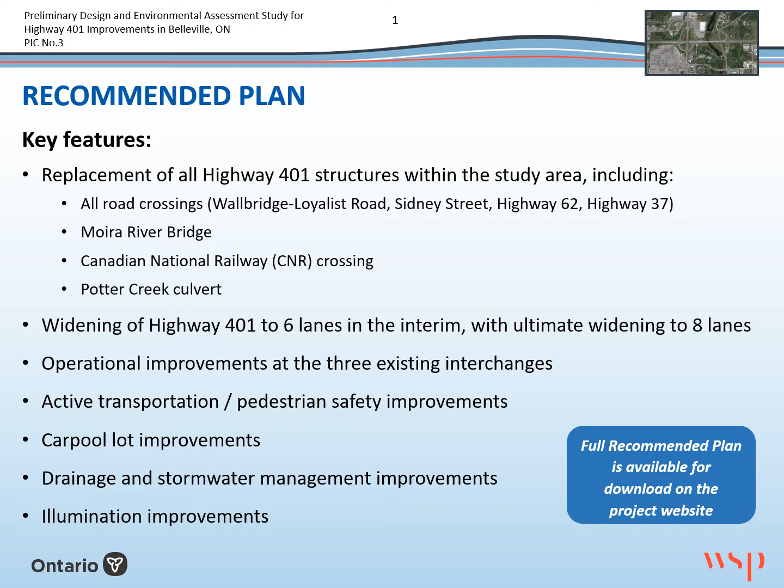The following slides focus on the interchange and crossing locations and will highlight the key features of the recommended plan. At the Wallbridge Loyalist Road interchange, the existing bridge will be replaced and the interchange ramps will be realigned to improve traffic operations and safety. To facilitate the improvements, Wallbridge Loyalist Road will be realigned to the west and tie back to the existing alignment by Grills Road to the north and Bell Boulevard to the south.

A new multi-use path to accommodate active transportation is proposed on the east side of the new bridge, and the proposed improvements are compatible with municipal plans for the future widening of Wallbridge Loyalist Road to 4 lanes. In order to accommodate the interchange improvements, the existing Potter Creek tributary will be realigned to the north and west.

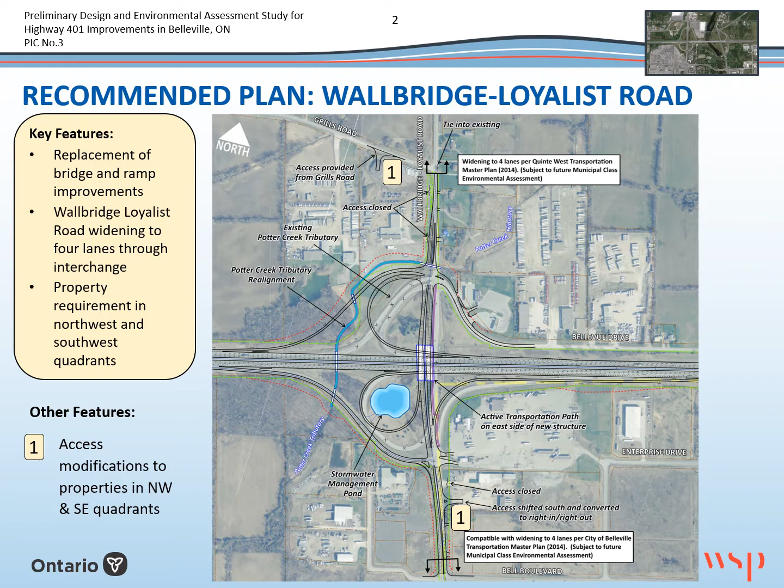There will be a number of property impacts in order to accommodate the improvements, and existing commercial accesses to the north and to the south of the ramp terminals along Wallbridge Loyalist Road will be either relocated or converted to right-in, right-out accesses.

At Sidney Street, the replacement of the crossing structure over Highway 401 will require a slight realignment of Sidney Street to the west. The replacement bridge is compatible with municipal plans to widen Sidney Street to 4 lanes. A new active transportation path will be provided on the east side of the new bridge, and a sidewalk will be provided on the west side of the bridge. Some private property will be required in order to accommodate the proposed improvements.

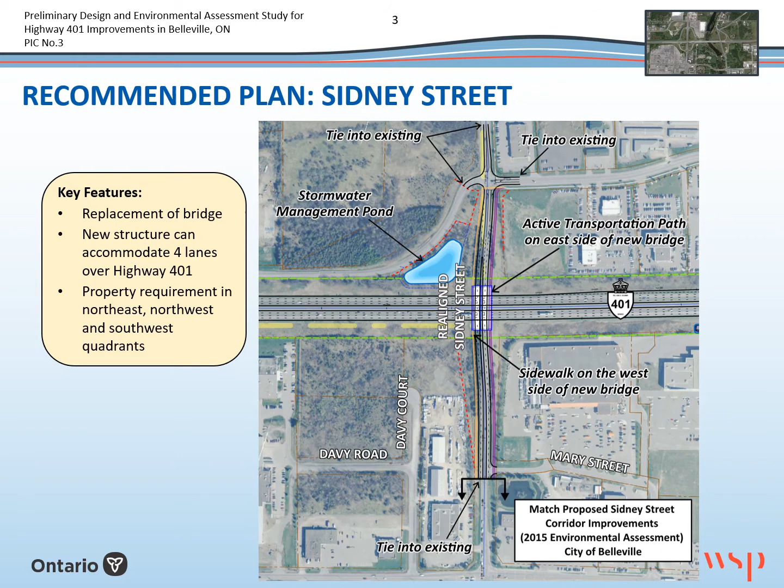At Highway 62, the interchange will be reconfigured so that the ramps are on the western side. This helps provide separation between the Highway 62 and Highway 37 interchanges and improve traffic operations on Highway 401. Having the ramps on the western side also provides opportunity for an active transportation path on the east side that would then have fewer ramp crossings and conflicts with traffic.

The active transportation path will help enhance pedestrian safety and active transportation routes across Highway 401. Its final design will be confirmed in future design phases and in agreement with the City of Belleville. Access modifications are required south of the interchange and are further detailed in the next slide.

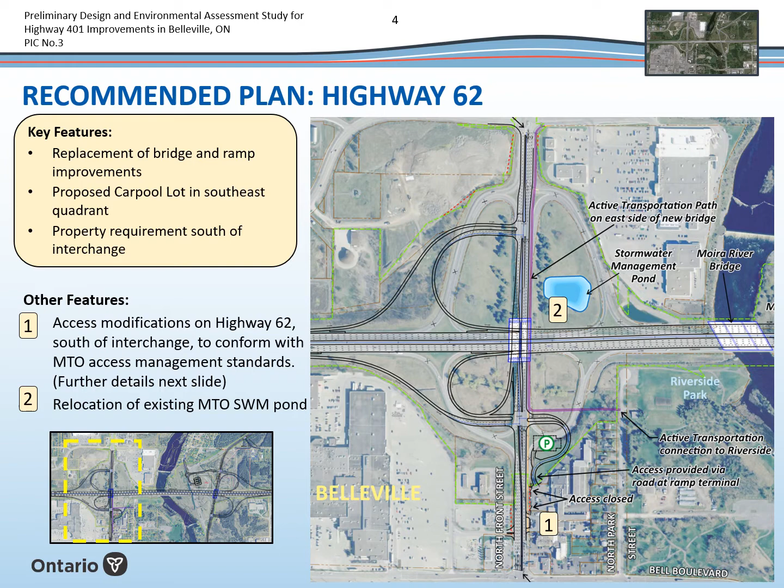South of Highway 401, at the Highway 62 interchange, a new carpool lot is proposed in the southeast quadrant with a connection to the ramp intersection. The connection will also serve as the new access to the existing business located adjacent to Highway 62, as its driveways onto the roadway will need to be closed to conform to current MTO access management standards. Other existing full access to businesses on the east side of Highway 62 will be converted to right-in, right-out only.

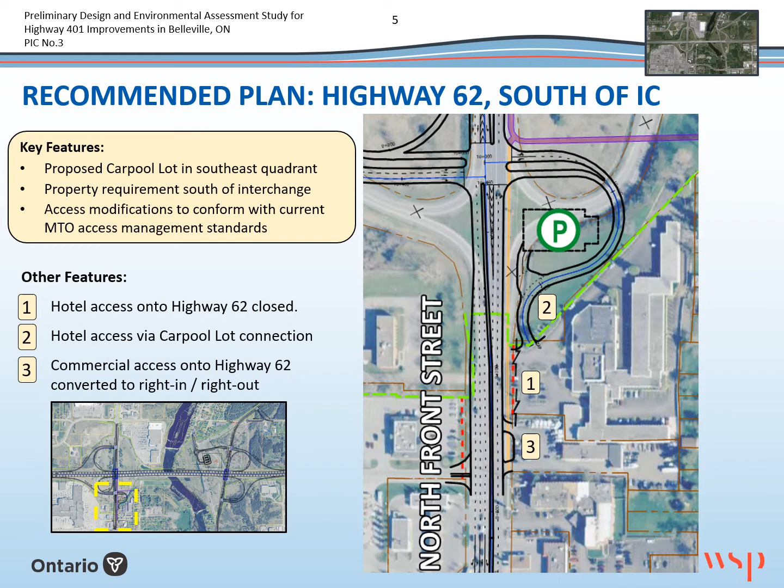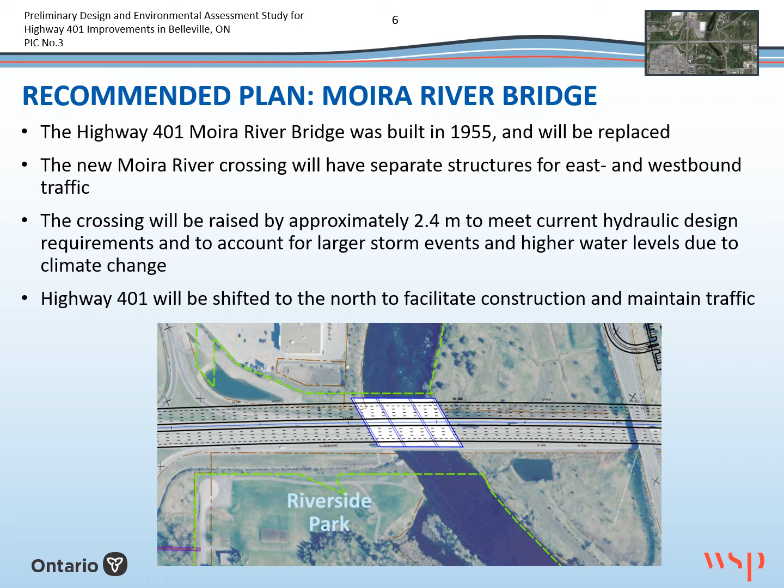The existing Moira River crossing was constructed in 1955, and like other structures along the corridor, it will require replacement. The replacement will consist of 2 separate bridges, one carrying eastbound traffic and one carrying westbound traffic. The new bridges will be built higher than the existing bridge in order to provide better hydraulic clearance for the Moira River. In order to maintain all lanes of traffic on Highway 401 during construction, a slight shift of the highway alignment to the north is required.

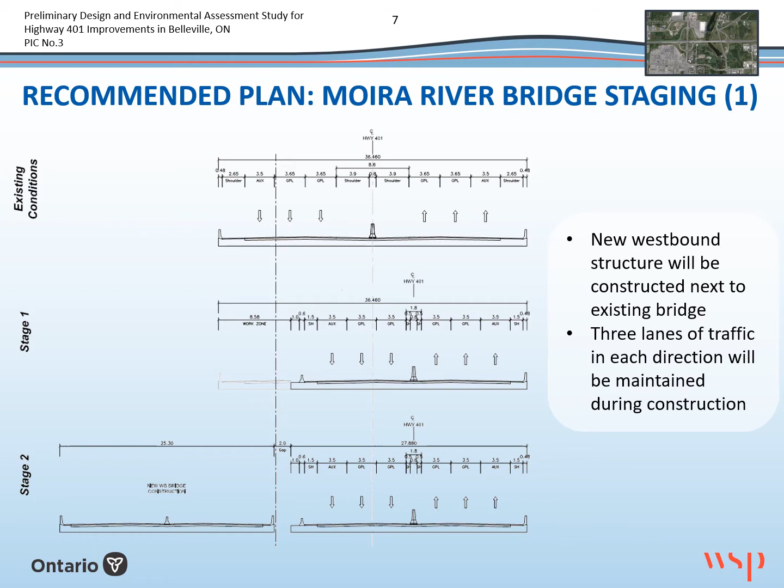The following 2 slides demonstrate how the Moira River Bridge will be replaced while maintaining traffic on Highway 401. In the first stage of construction, traffic will be shifted as far as possible to the south side of the existing bridge, and the north part of the bridge will be demolished. In the second stage of construction, the new westbound bridge will be constructed to the north of the existing bridge. In Stage 3, once the new westbound structure has been constructed, all traffic is shifted onto the new structure, and the existing structure is demolished.

In Stage 4, construction is complete, with eastbound and westbound traffic each being carried by their own bridge. At this time, Highway 401 can be widened to carry 6 basic lanes, plus 1 ramp lane in each direction. A further widening of the eastbound bridge in the future will accommodate an ultimate widening of Highway 401 to 8 basic lanes, plus 1 ramp lane in each direction.

At Highway 37, the interchange will be reconfigured so that the ramps are on the eastern side, opposite to Highway 62. Along with an easterly shift of Highway 37, this configuration will provide better separation between the two interchanges and improve traffic operations on Highway 401.

North of Highway 401, and as detailed in Part 2 of this PIC presentation, an extension of Cannifton Road to intersect with the North Ramp intersection and the shift of the Black Diamond Road intersection northerly was identified as the preferred municipal road network configuration.

South of Highway 401, the realignment of Highway 37 results in access modifications for residential properties and impacts the existing carpool lot. A new expanded carpool lot is proposed in the northwest quadrant of the interchange and will be accessed by a new roundabout that provides connection to Cannifton Road. South of Highway 401, the Highway 37 realignment will also require the relocation of the city's Adams Street water booster station.

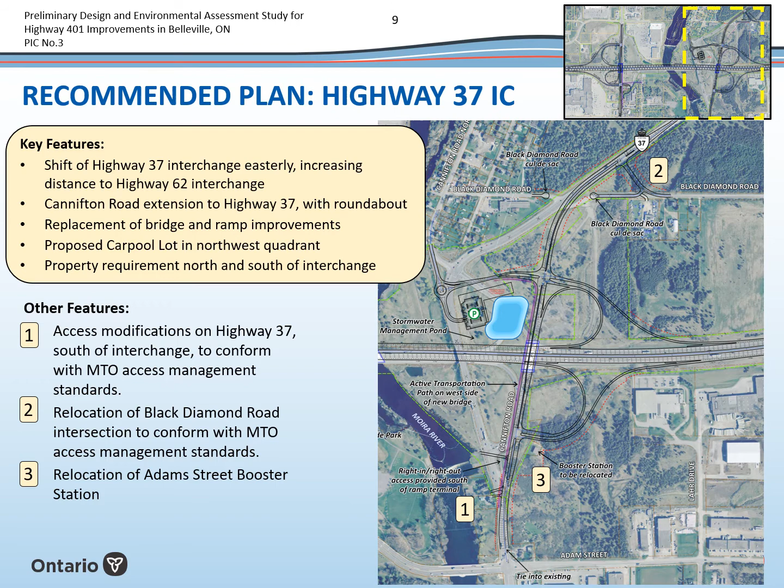The recommended plan includes the widening of Highway 401 to 6 lanes in the interim and to 8 lanes in the long term. To facilitate construction staging, the 6-lane Highway 401 configuration will feature a wide, barrier-separated median between Sidney Street and the CNR rail crossing. In the ultimate 8-lane configuration, Highway 401 will have a similar cross-section design throughout the study area.

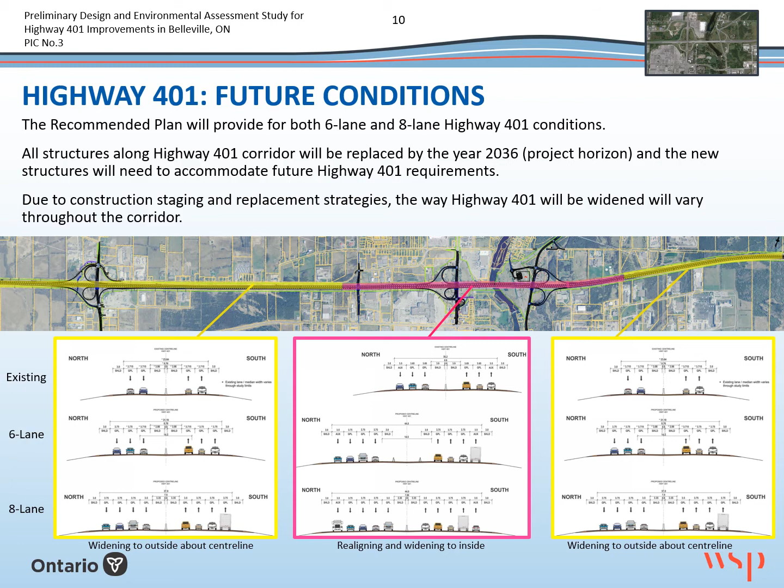A preliminary construction staging plan is being developed as part of this study and will be further refined in detailed design. For the vast majority of the construction duration, traffic will be maintained on Highway 401 and crossing roads. Short-term disruptions and closures will be required at some locations to implement improvements, and where possible, disruptions will occur at off-peak times. Highway 401 detours onto municipal roads or emergency detour routes, EDRs, will be required during bridge demolitions for periods up to 24 hours. Emergency vehicle access needs will be considered as part of the preliminary construction staging plan and will also be confirmed in detailed design.

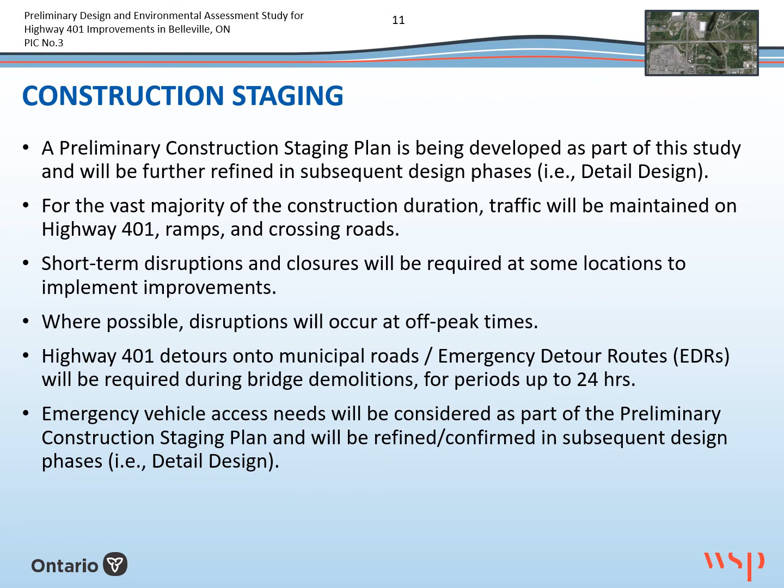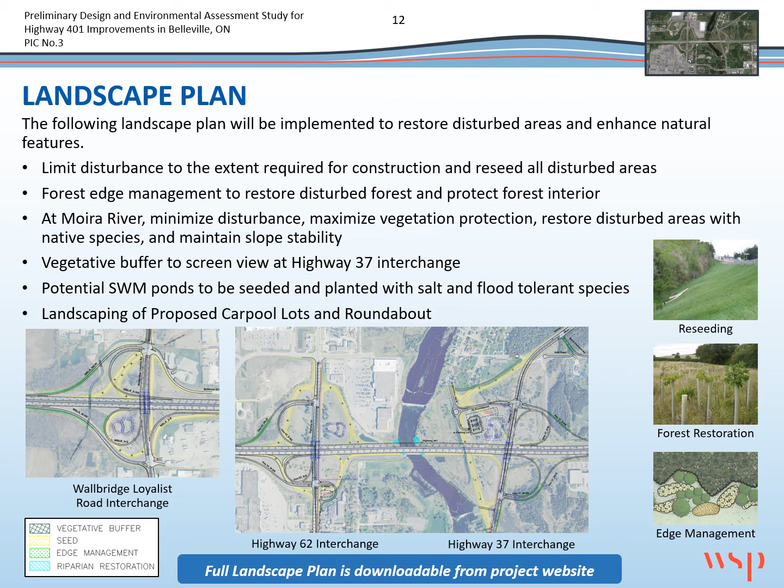This slide gives an overview of the landscape plan that will be recommended as part of the Highway 401 corridor improvements. The full plan is available for download on the project website. Overall, any disturbance to the natural landscape due to the improvements and/or construction activities will be mitigated using reseeding, forest restoration, and edge management. Disturbance due to in-water activities at the Moira River crossing will be mitigated by riparian or riverbank restoration.

Active transportation has featured at each interchange and crossing location. This study will ensure facilities will be accommodated in conjunction with the proposed corridor improvements to enhance pedestrian safety and remove Highway 401 as a perceived barrier to the active transportation network. The final configurations and design will be confirmed in later design phases and are subject to municipal agreement.

During this study, additional crossings of Highway 401 were also considered, however screened out. This included an active transportation path under the new Moira River crossing, which was screened out primarily due to low headroom and likelihood of flooding. This also included a crossing under the new Highway 401 CN Rail crossing east of Highway 37. This crossing was screened out as it would require additional property and a larger structure. An AT path is already being provided on Highway 37.